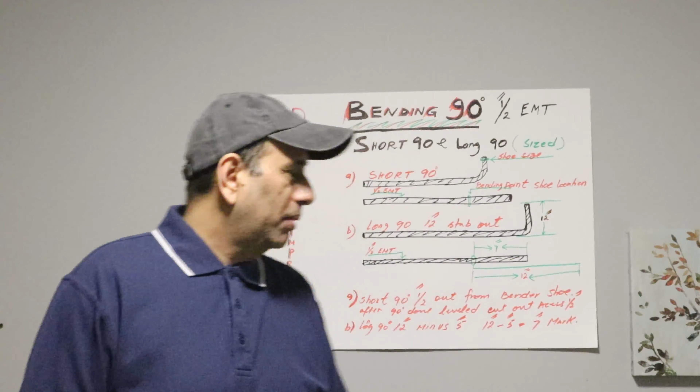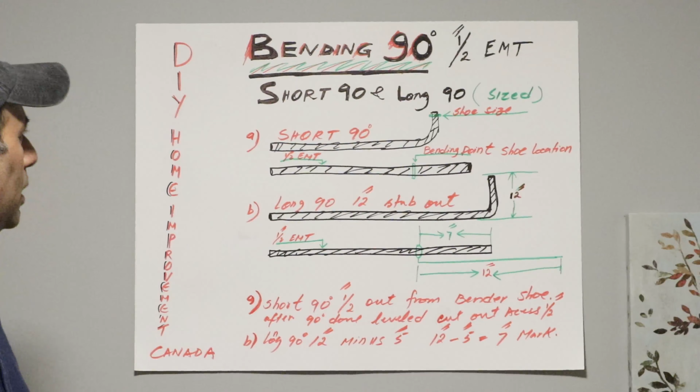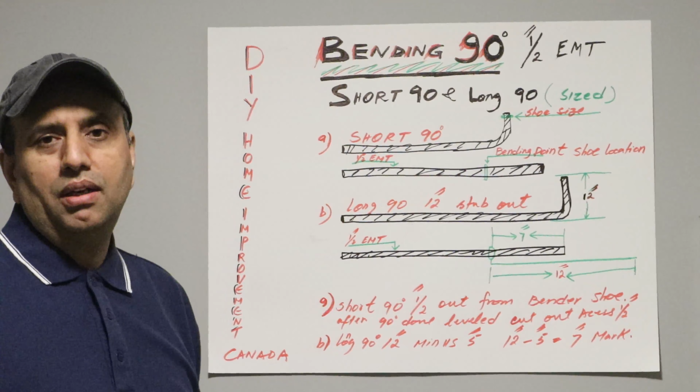As I explained on the chart here, this chart has bending 90, and this is, as I said, on half-inch EMT conduit, short 90 and a long 90. So when I say the long 90 sized, it means that if we need a 12-inch, we need a 10-inch, or we need about 20 inches. So that's, I call it a sized long 90.

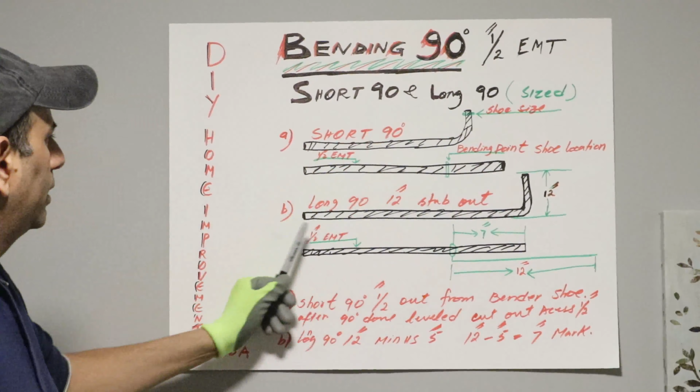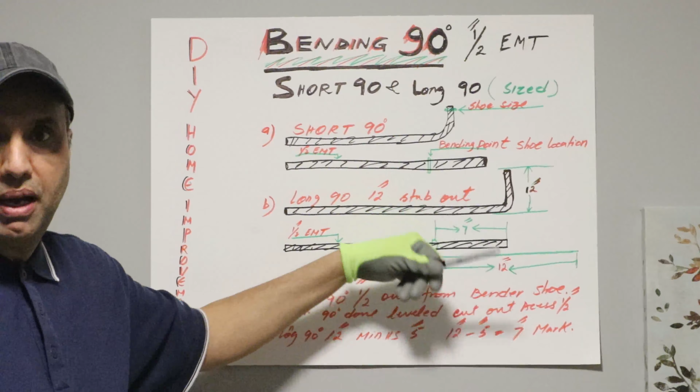So again, the short 90, right, we gotta focus on the shoe size, and then this is our conduit, and then we will put our bending point and then shoe location. And I'll explain it when I do the bending on the shoe. The next one, B, is a long 90. The long 90, let's say, is a 12-inch stub out. So this is basically a stub out.

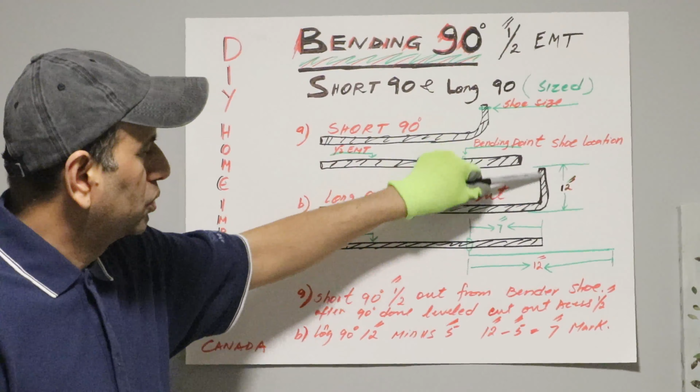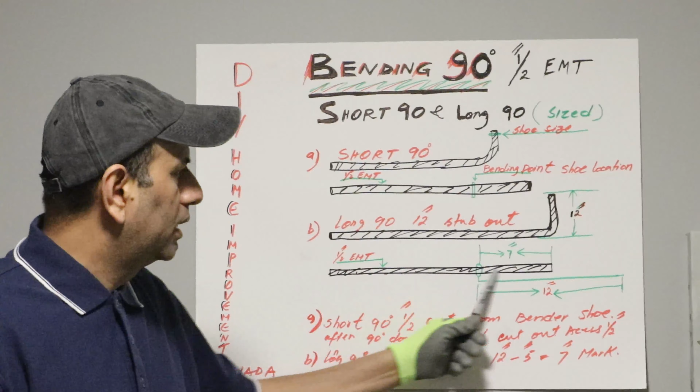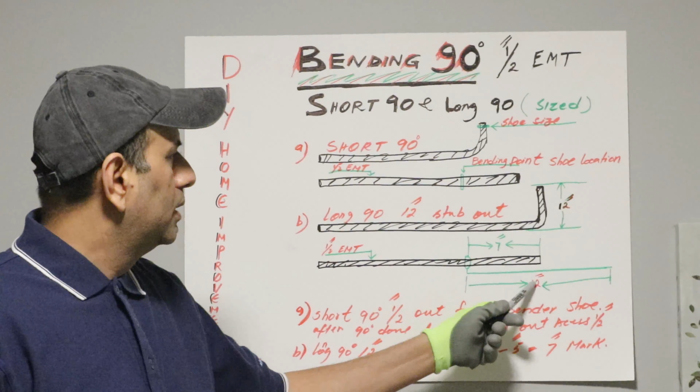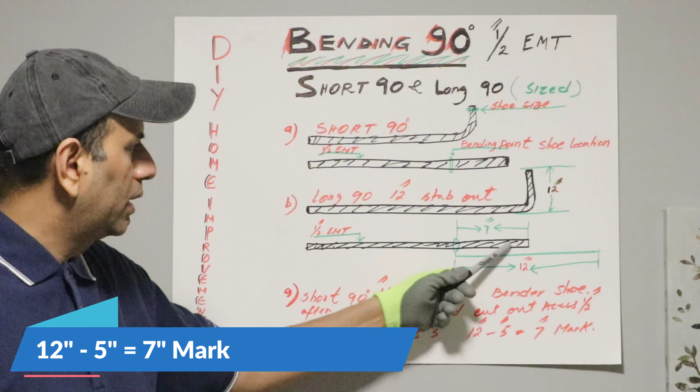So you want a 12-inch stub out exactly, and I'll show you how it is on the half-inch 90, and then that's the conduit. The conduit is a half-inch, and when you do a 12-inch 90, what we have to do basically, we have to minus the shoe size. So let's say the shoe size is 5-inch, so we gotta minus 5-inch from 12-inch, and our first mark is gonna be 7-inch. So 7-inch is gonna be the first mark. So this way we're gonna get a 12-inch long 90.

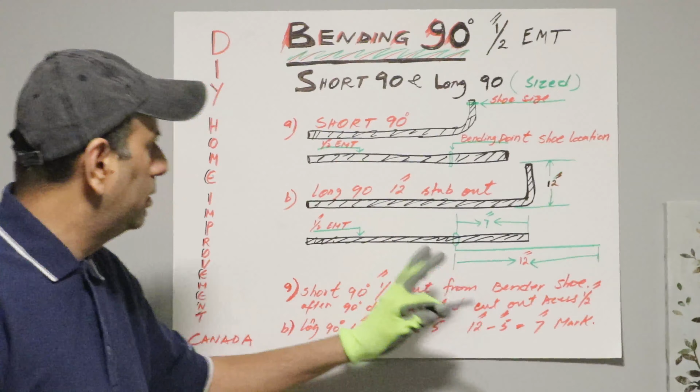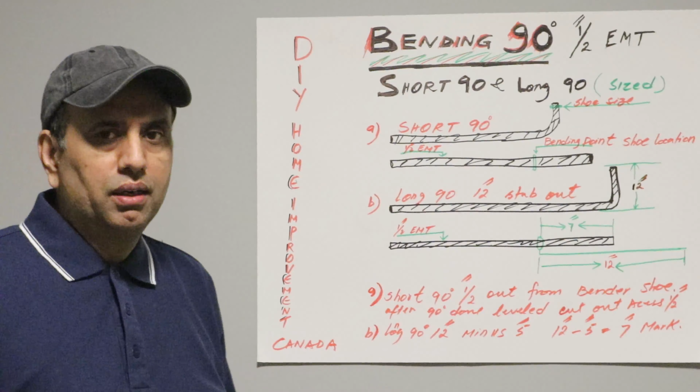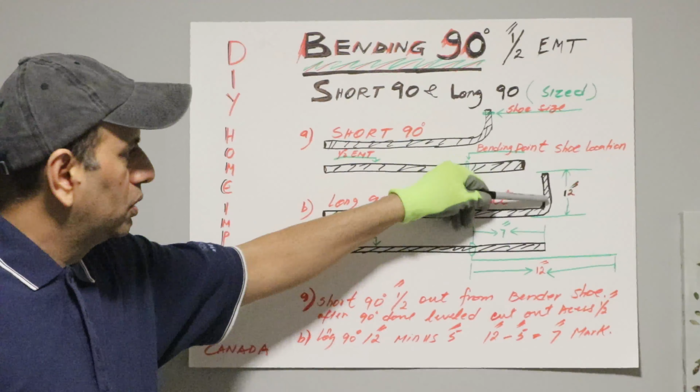Again, pretty straightforward, simple. We're gonna do a bending 90, half-inch EMT conduit, short 90, and I'll tell you some tricks in the short 90, how we have to keep it a little bit longer, right? So when I bend it, I'll explain how we have to do that short 90 and also long 90. Long 90 could be a 12-inch, could be, as I said, 10-inch, and could be a 20-inch. So how we're gonna measure it and how we'll put our first mark on the conduit.

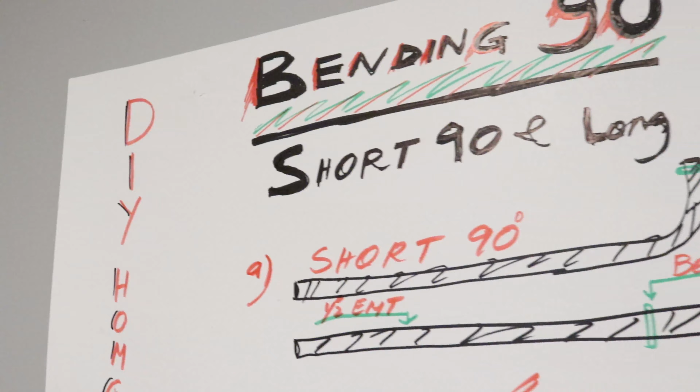So some of you are wondering why I'm explaining on the chart. There are different types of learners. Some of them can learn through the theory, and some of them learn only from the practical. So that's why I brought this chart, and now let's actually do the practical, how to bend the 90.

To bend a 90 we require a few tools, and those tools are pretty common and pretty simple. So as we start learning conduit bending and doing some practice for a short 90 and a long 90, obviously we need the level. It's pretty simple, cheap, and it will give accurate leveling. And also we obviously need a measuring tape. We got a measuring tape, and for the measuring tape, I'll tell you a trick. It's a little trick. It's not a trick actually.

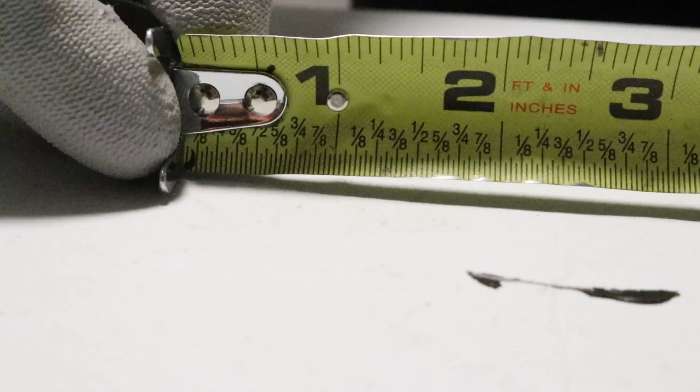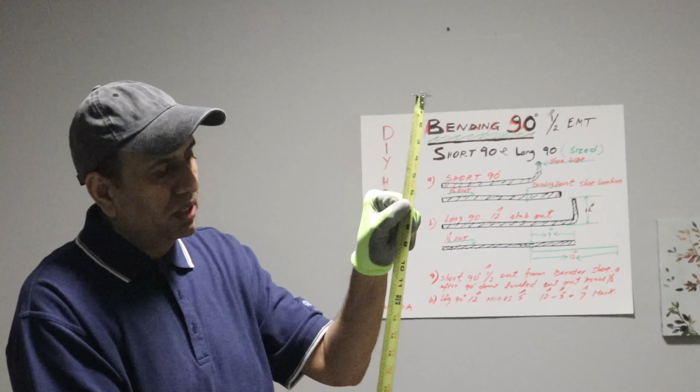3/4 and 5/8, 3/8 and 7/8. Look for this measuring tape so that you can get exact measurements, right? Rather than getting another measuring tape, I believe that this is good for a starter. And obviously we need a marker, right, and our bender. So let's do a practical now.

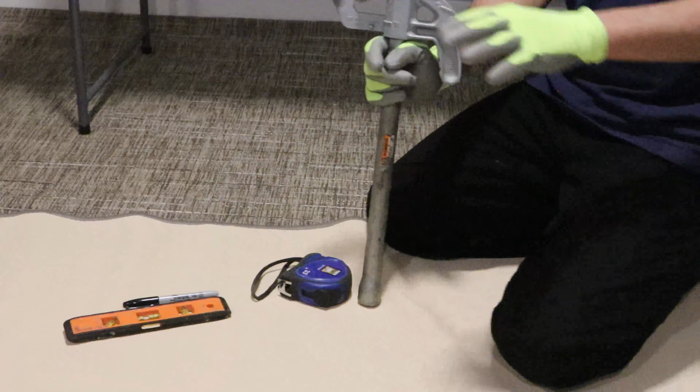So we are going to do the short 90 out of the two, and I'm going to use these tools. This is one of my benders, and also I have the measuring tape, my marker, and the level. And you can see that I am using this half-inch conduit, and you can see that this is a 3-point saddle bend, and I'm gonna use this for my short 90, and I'll also put the link in the video for the 3-point saddle bend.

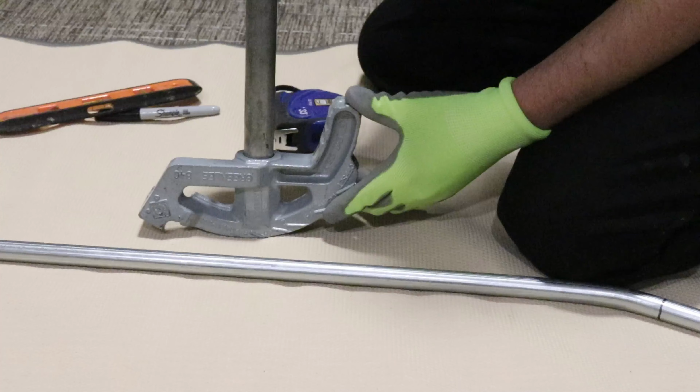So let's start it. Yeah, so I just put a mat on the floor that has a kind of grip on it and keeps it level. But when you're doing it in the industry, make sure to use some wooden board on the floor.

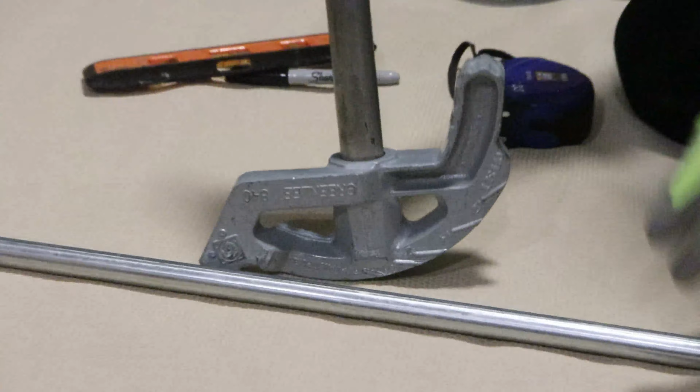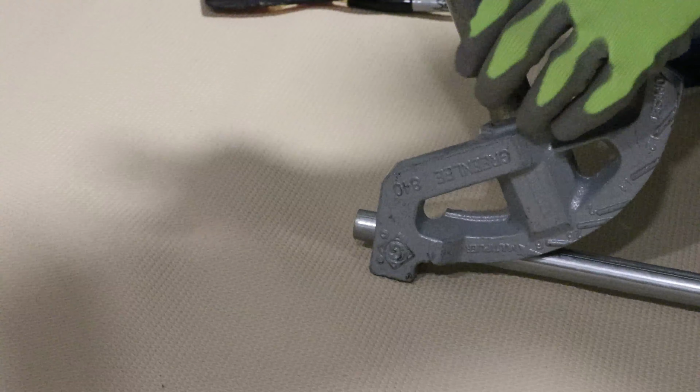Because I'm doing this demonstration at my place, that's why I'm using this little carpet. That's the bender. It's very easy to make a short 90. I will just put that in my bender shoe, and you can see here that I will bring the bender all the way, just about an inch away from there. Why I'm taking that inch away: because if I keep my shoe to the end, I may end up squeezing the end of the pipe.

So I will go back about 3/4. Once I do my short 90, after I can cut this, and this way we'll get a nice finish. So let's bend it now. It's very easy. I'll just give a pressure, and pressure it, make it stable, and pressure more, and you can kind of see if this is looking straight or not.

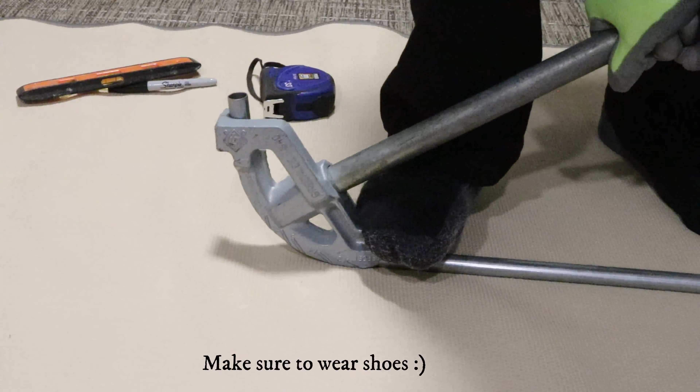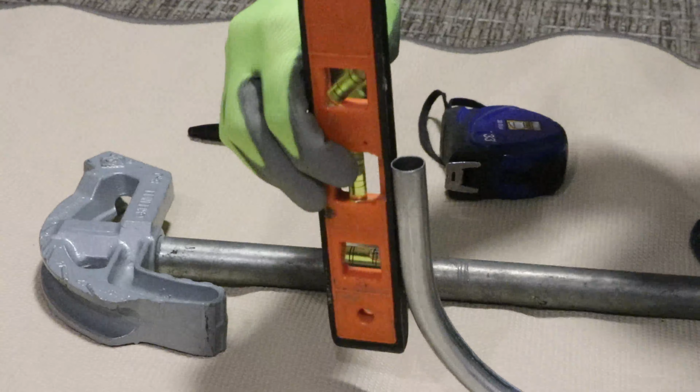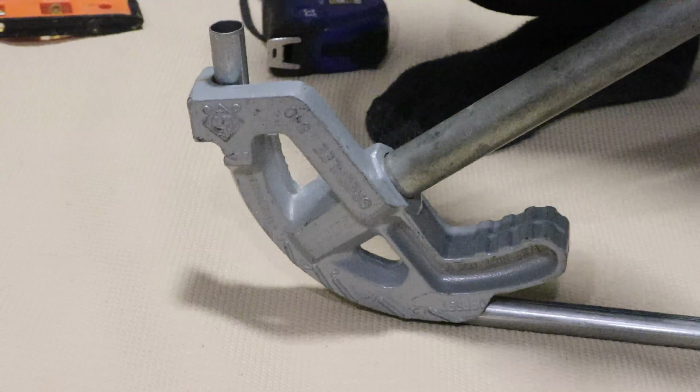But I'll bend a little bit more here, and after bending I take that out, and then I check the level. See the level here, that means we need to bend a little bit more. I'll put my bender shoe back. Now I have a question myself: where should I put it back? When I go all the way up, you see it's kind of settled down here. Or we can mark it here before we bend.

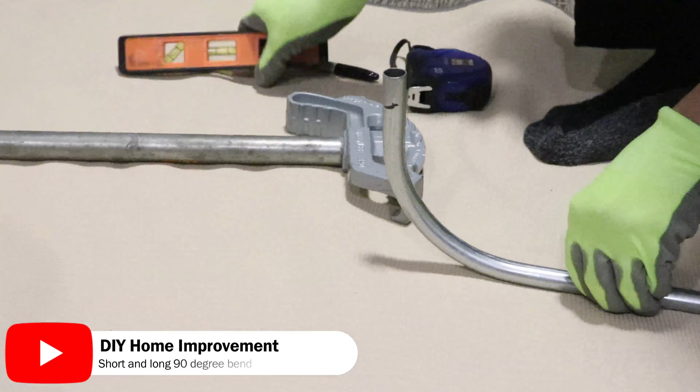So let's make this bend straight. Bend it more a little bit. Bend it. Okay, a little more. Now I'll go and double check. Take my bender out, and let's see if this is level. So it's a little bit more.

I'll do it again. Put it back again, and I know that I have my mark there. I bring my bender shoe all the way back to this edge. See that mark? And I'll bend it more a little bit. There you go. Go back again, and I'll open it. So see, now it's more bent. Now I have to bend it back. It's very easy.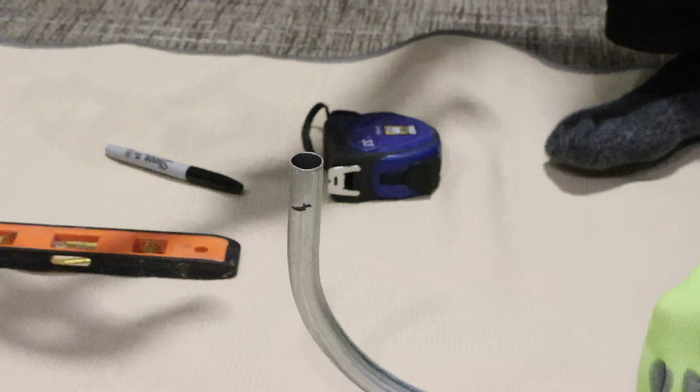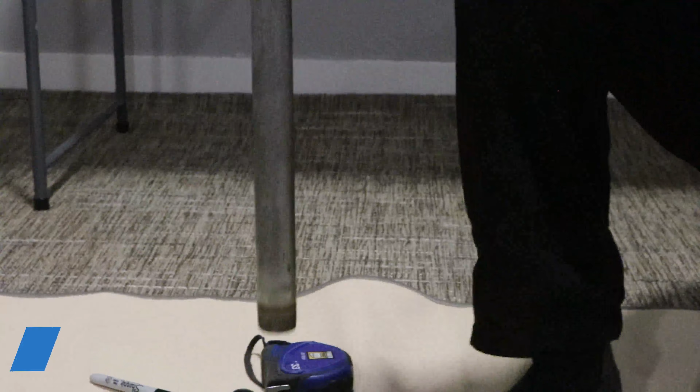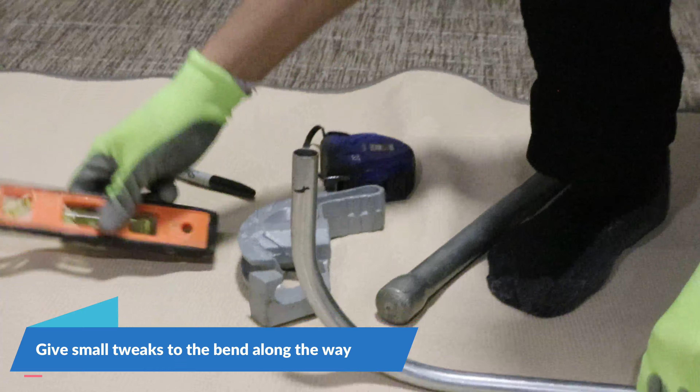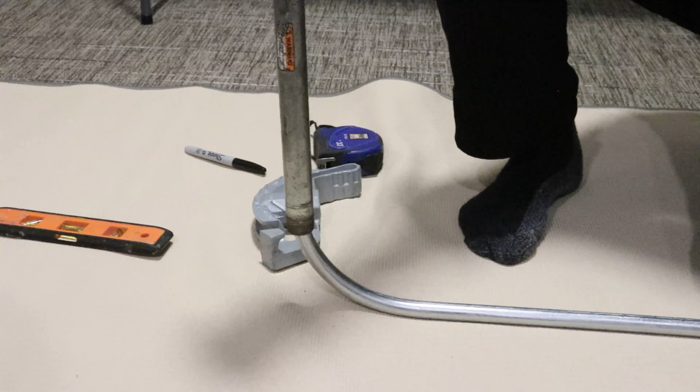I'll take the bender shoe off. You may have a different bender on the back side if this is open. So I'll go back a little bit, and I give just a little tweak here. Okay. Check it. It's almost there. Just bend it back a little more. There you go. You can see here, your level is almost there.

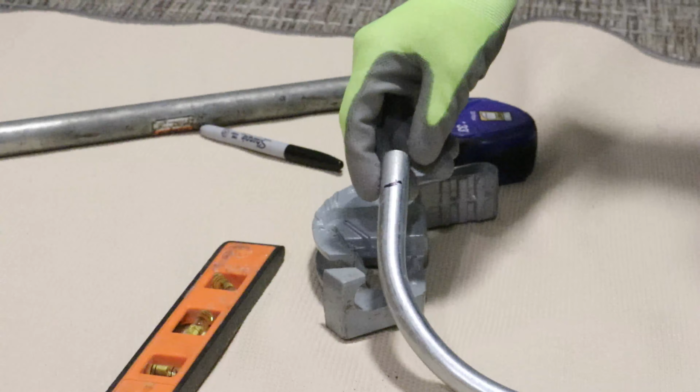So this is the way you bend a short 90, and when you're done, you can cut it from here. Last time, when I was showing one of my apprentices, he bent it from this edge, and then he brought it to me, but the end of the pipe was kind of squeezed. So the good practice is to have a mark about 3/4 bigger, and then you can cut it, and your short 90 is gonna be excellent. So this is the way to finish your short 90.

Next we're going to do a long 90, and this 90 is gonna be 12 inch. For 12 inch we need a long 90, and I'm going to use this same EMT, and this is a 30-degree offset bend that we previously did.

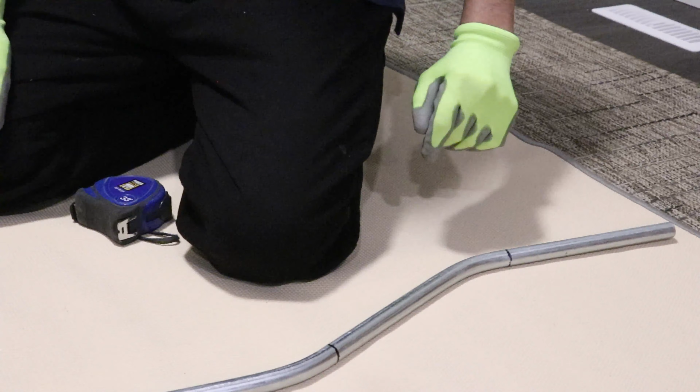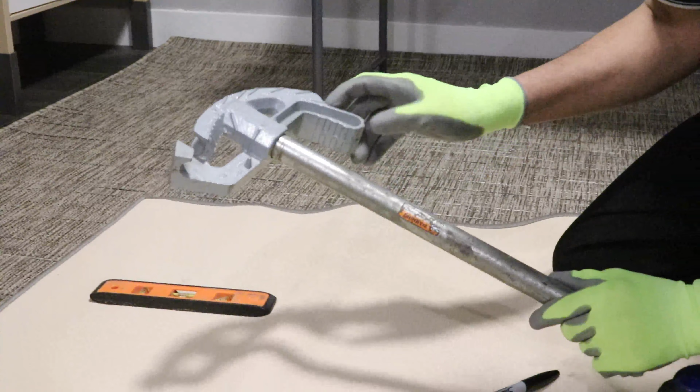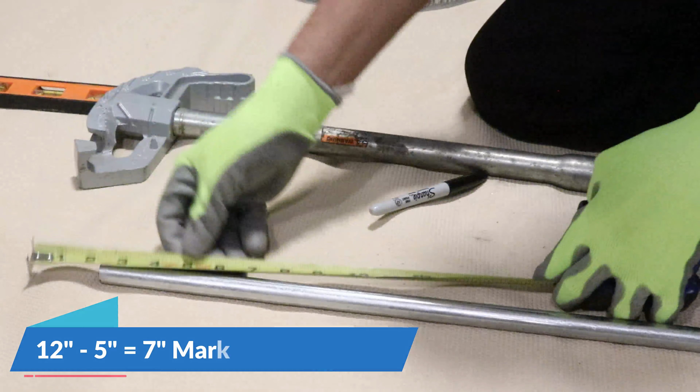So again, let's do a 12-inch, and 12-inch is a little bit tricky, but it's not difficult. It's very easy. So how are we gonna do it? So I have my bender here. This bender shows it has a 5-inch deduction. So if I want to make a 12-inch long 90, what I'm gonna do is minus 5 inches out of 12. So 12 minus 5 equals 7.

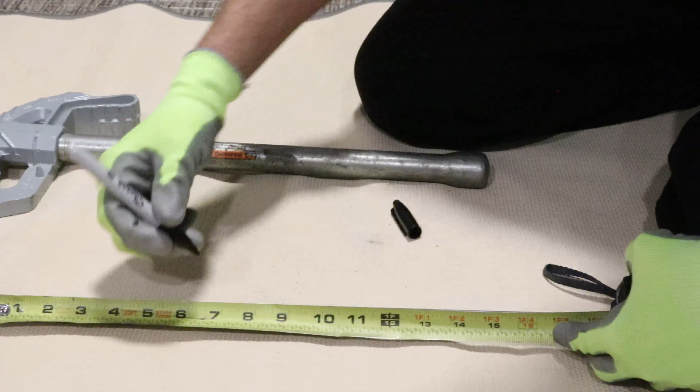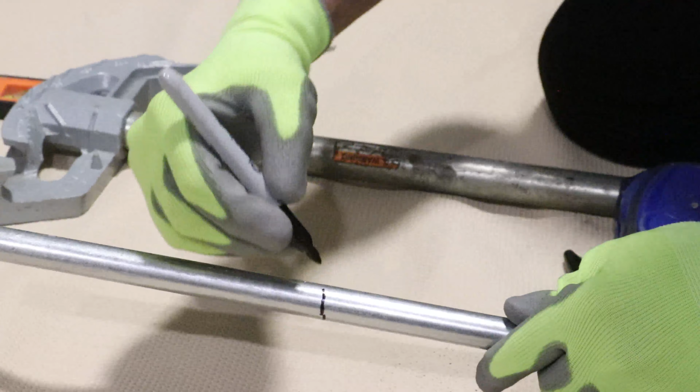So I'm gonna put my first mark on the 7 here. So I got my mark and I'm gonna round this mark. I'm using this Sharpie, but we never use Sharpie on the job site. We just use a pencil. So this is 7 inches, double check, and that is a 7-inch mark here. 7-inch mark, because we want to get a 12-inch. So you see 12-inch. What we did here, we minus 5 inches. See, the 5 inch is minus.

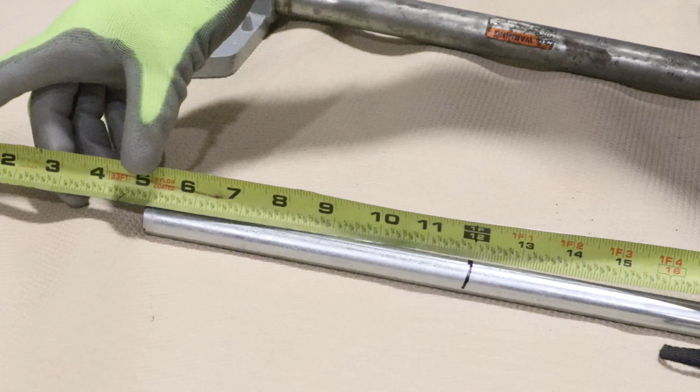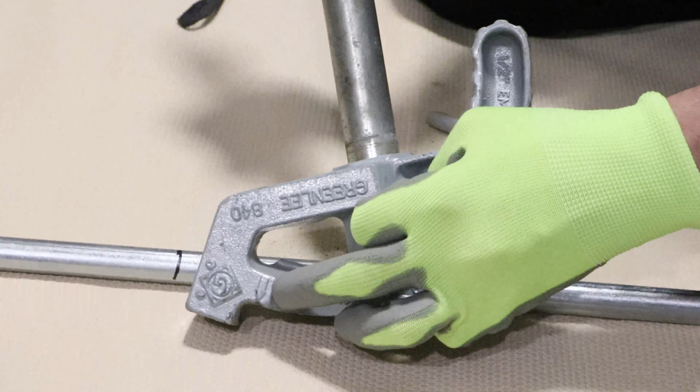Now with this mark we're gonna use our bender the same, and we're gonna bring it to the arrow. You see that arrow here. I'm gonna put my bender back here, and I bring my mark to the arrow, which is almost here. That's my arrow. Okay, here you go. So this is my arrow, and I want it stable nicely. So once I have my bender's arrow on my conduit mark, I'm gonna be stable, and I'm gonna use my pressure again, stable like that.

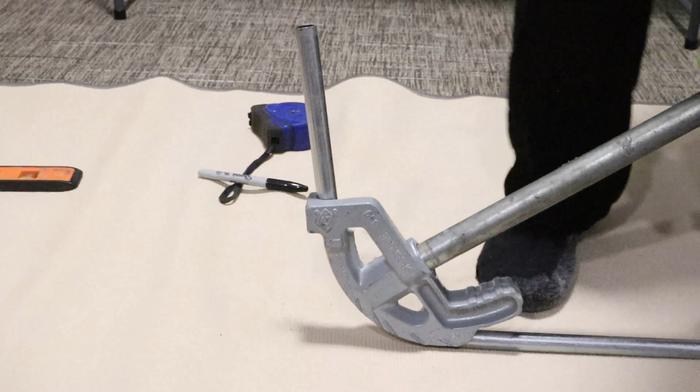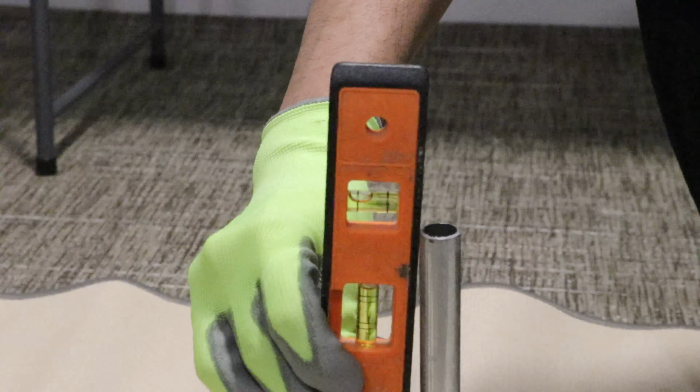Now I can put one foot here, and then I push it down slowly, push it down here, and it looks like I need to bend a little bit more, so I'll bend it more. And it looks like I need to bend a little bit more, so here, and I'll take my level, see how far. Yeah, I need a little bit more, so I'll bend it more here, and I'll check it. So yeah, now I bent more.

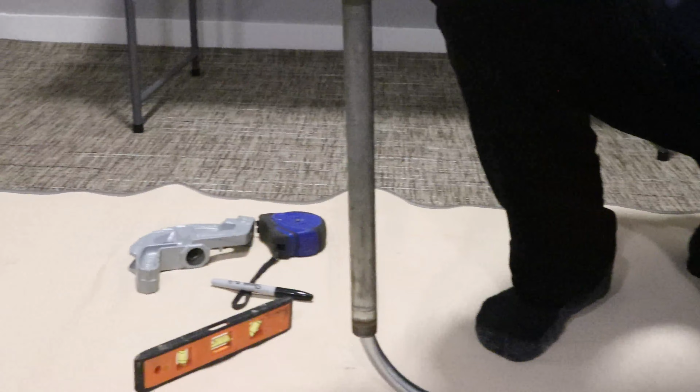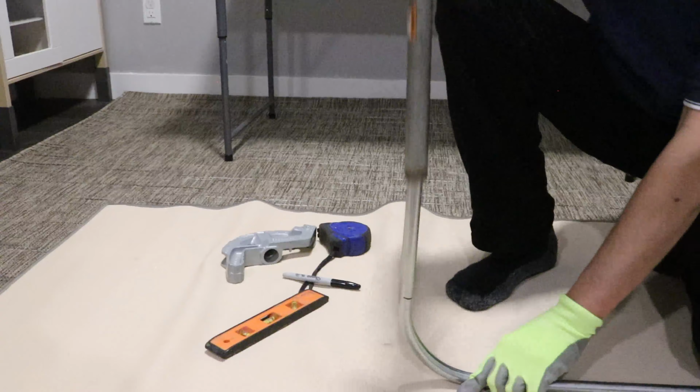So I'll do it again. I'll open, and then I will bend it back. So I'm bending back here. Here we go. See here. So I have to bend again a little bit. And wow, I have to bend back again. So I mean, when you practice, like you do 10 or 15 bends, then probably the level is 100%.

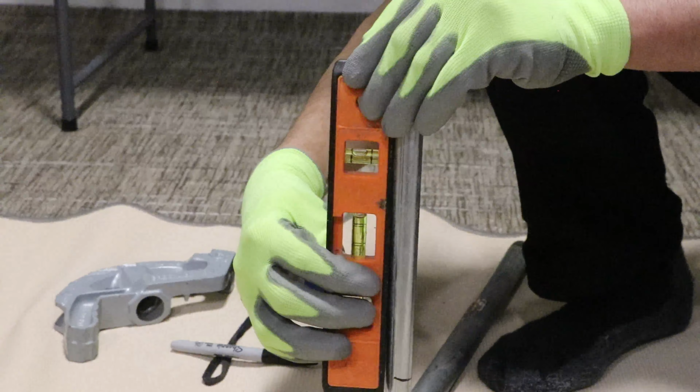Levels here. Now once this bend is done, I will just check if this is getting 12 inches. So it's a perfect 12-inch 90 bend. You can see that? It's exactly a 12-inch 90. So this is the way we bend a long 90. Alright guys, so we got both a short 90 and a long 90. It's very easy to make. Just need a little bit of practice and patience.

And again, you can get some scrap pipe from your job site. Please do not get a new pipe, right? Just scrap pipe. Or you can do one thing: go to Home Depot, you can get a pipe from there. Do the practice at your place. Do it a couple times till you get perfection. And this way your journeyman is gonna like you.

So this is the fourth video of our series. Probably a couple more videos will be coming. Last time we did a 30-degree offset bend, then a 3-point saddle bend, and a 4-point saddle bend. And today I showed you the short 90-degree, and also the 12-inch long 90. So guys, I'm here to do some practicals for you. Understand that this is not perfection. Perfection comes with time, right? And again, do some practice.